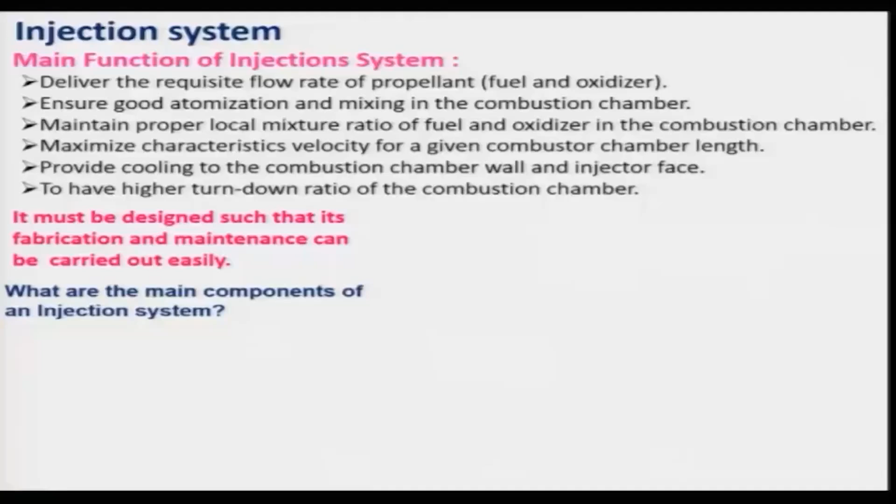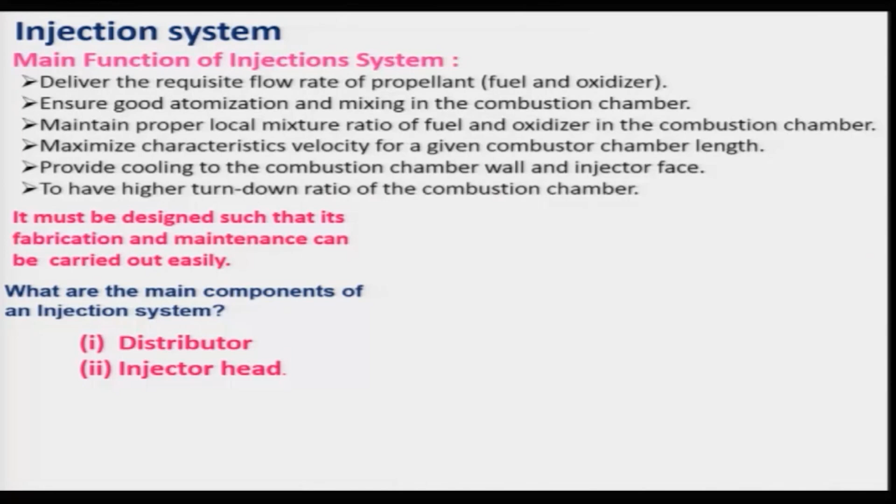What are the main components of an injection system? It has two components: one is the distributor, the other is the injector head, in which the atomizer will be placed. Let us look at a distributor along with the injector head, where the injector head with holes is basically the atomizer. This is the injector head which carries these holes or orifices, which are nothing but the atomizer.

So, therefore, it will be having, if you look at, this is having an atomizer and the propellant. There is a liquid propellant which will be passing through this into this orifice or the injector heads, and then it has to be distributed in such a way that fluid will pass through this in a proper way, so that the uniformity of the flow through each orifice will be similar if not same, so that the atomization process will not be affected.

And this is your schematic. There should not be any short circuiting, that means it should not come over here, there might be a baffle which can be used, not shown here, it should not come and hit so that higher velocity will be coming through this nozzle, that is not really called for, but rather it will be distributed properly.

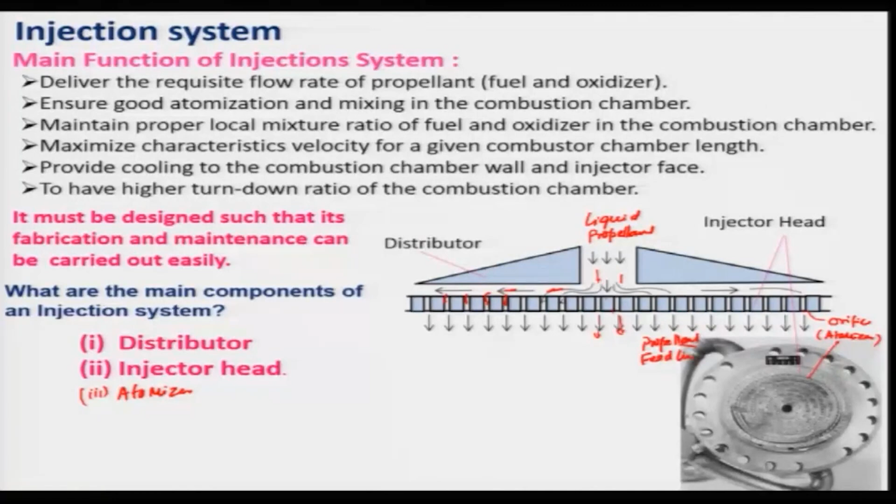And if you look at this injector head which I have shown, this is the actual photograph. You can see these are the holes which are the orifices or atomizer, and which is having a certain circle, a pitch circle it is being used, and this is your feed line, the propellant feed line which comes through that. Below this injector head there is a distributor which is not shown in this photograph.

What is atomization? Atomization is a process by which the bulk liquid is converted into arrays of droplets, what we call spray.

A question might be coming into your mind, why we need to have this atomization? Why not burn the bulk liquid itself? Keep in mind that one can burn the bulk liquid, but however, one has to vaporize the liquid, and also the amount of vaporization of the liquid propellant will be dictating how much energy will be released per unit area per second.

So, we need to convert this bulk liquid into droplets of smaller diameter, such that the surface to mass ratio, or surface to volume ratio, will be really higher. The higher the surface area, the better will be the vaporization, whereas the mass of propellant being burned will be dictated by the volume. So, it is better to have smaller droplets, such that higher surface area will prevail, and due to higher surface area we can have a higher rate of vaporization of the propellant.

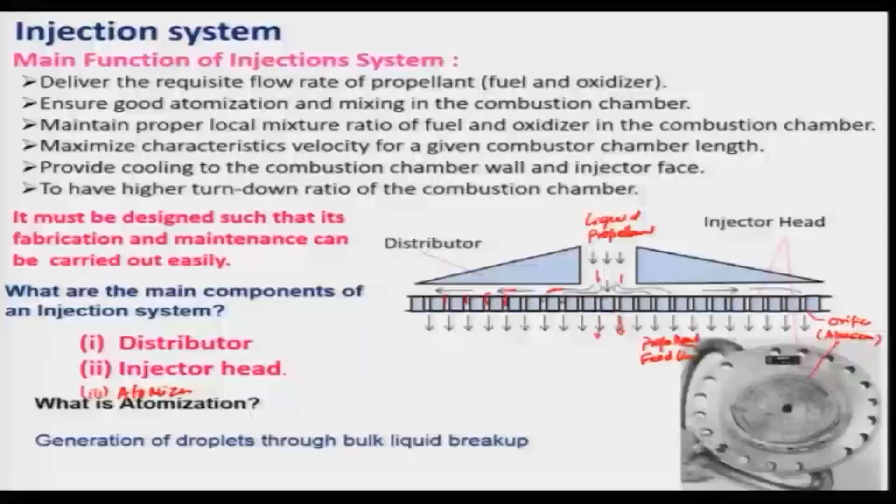And once it is vaporized it can mix with the other oxidizer, such that combustion can take place, provided it is ignited properly. So, it is very important to have better atomization. Let us look at what are the basic processes involved in atomization, or during atomization.

So, let us look at a tube in which you have a liquid passing through it, and what will happen if it is not injected at high pressure - then you can see that the liquid will come over here due to gravity, because of that, it will just be at the orifice or the hole, the exit of this tube.

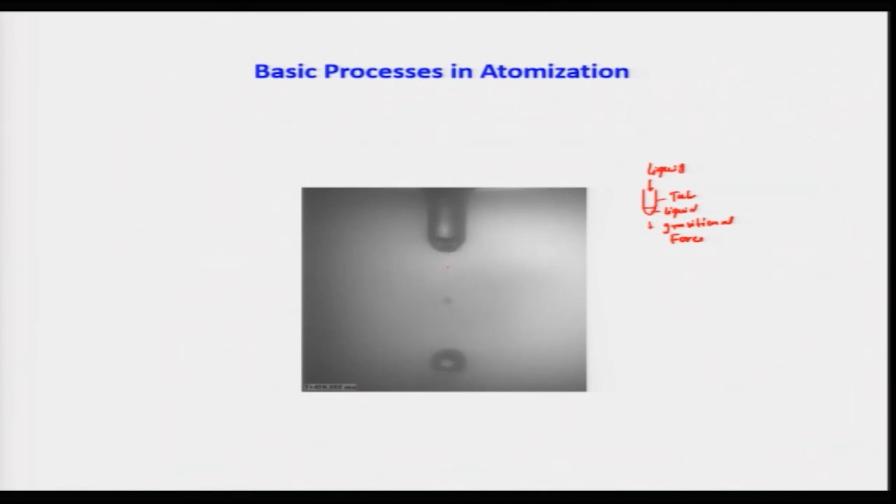This is your liquid envelope which will be coming, and once it goes, then because of gravity, it will be a little bit down, and the surface tension force will be overcome by this gravitational force. And then it will be separated out, as you can see, thinning down due to the thinning of the liquid surface, and when it is pulled by gravity.

And keep in mind that as a result there are satellite droplets, and if you look at this, it will be coming over here, and then it will be thinning down, and this will come to that, and that will be a droplet which comes over here, and this again is being formed. So, this is known as a satellite droplet.

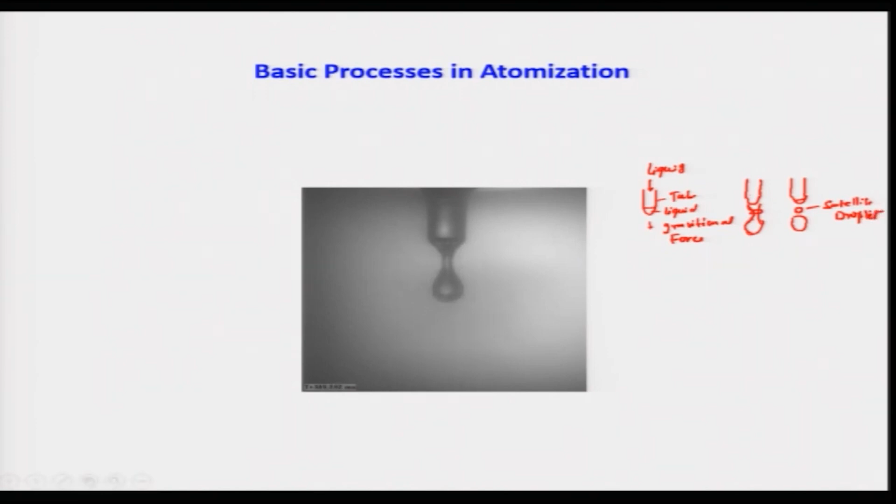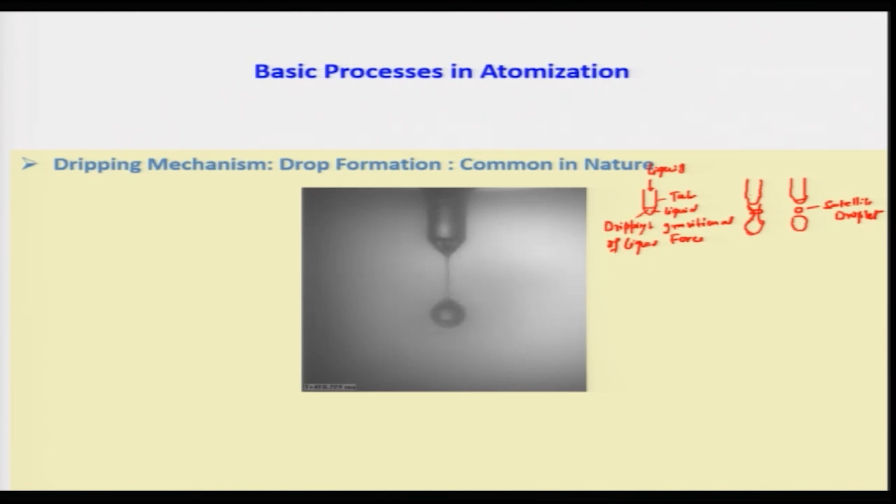And the question arises, what is the dripping mechanism? This is just about dripping of the liquid, and this is basically dripping of liquid, which is very common in nature. So, the gravity force exceeds the surface tension forces acting here, and then it is separated out, and satellite droplets are formed, and also the bigger droplets.

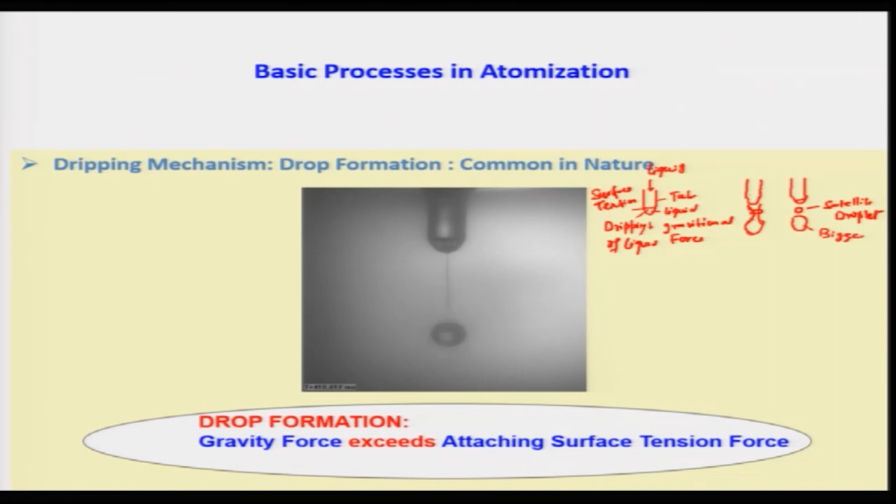The question is, what do you mean by atomization? As I told, atomization is the process by which the bulk liquid is basically converted into arrays of droplets. Let us look a little further and see what is happening.

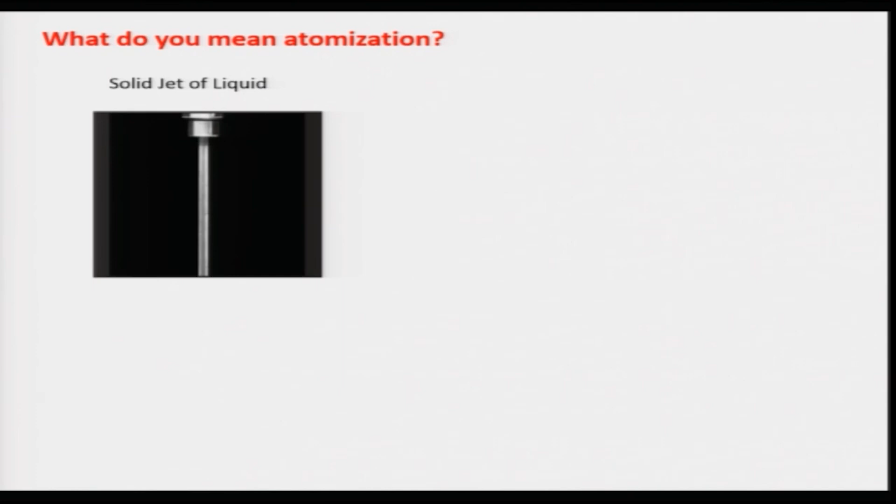If we take an orifice, or a pipe with a hole, and pass liquid through it, a solid jet is coming through that. This is your solid jet of liquid, which is not really affected by the forces acting over here as it passes through this straight tube. Of course, it is very difficult to achieve the solid jet in a true sense, and this solid jet of liquid is used for fire extinction. That means you can use water as a fire extinguisher.

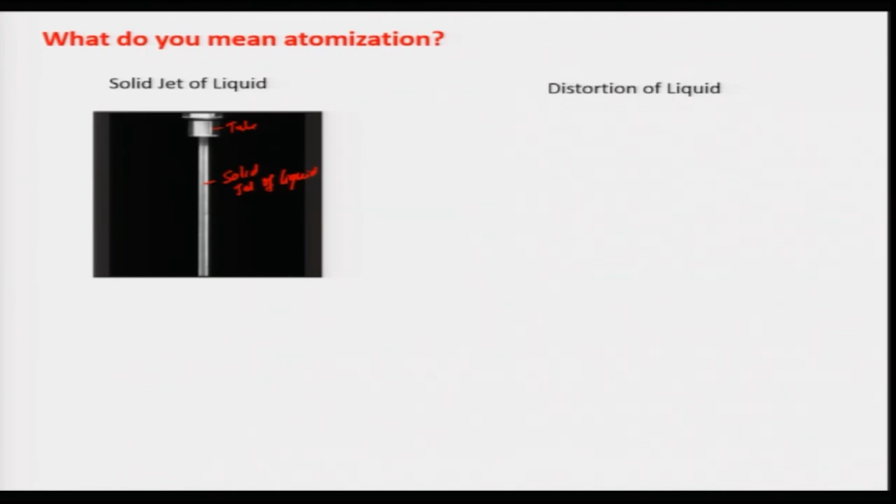But for atomization, this is not what we should desire to have. We are not interested in that; what we need is to disturb the liquid such that it will disintegrate very easily into droplets. That is the requirement for better atomization. So for that, we put the liquid at a very high pressure, passing through this orifice or hole.

This is your hole or orifice, and keep in mind there are a lot of ripples over here, and this bulk liquid is disintegrated, as you can see in this diagram. The question arises: why does the solid jet of liquid remain intact without any distortion? It's because the resisting forces are greater than the disruptive forces.

If you look at the resisting forces, one is the surface tension force, and another is the viscous force. If it is a viscous liquid with surface tension forces, you can have it come out properly as a solid jet of liquid if designed correctly, when resisting forces are greater than disruptive forces. The disruptive forces include inertia force, aerodynamic forces, and turbulence which will be generated.

In this case, when the liquid is distorted to form a spray, the resisting forces will be weaker compared to the disruptive forces. When the resisting forces are greater than the disruptive forces, there is no atomization.

That is also true for a country, for a family, for anything that wants to keep its identity together. When the elements are together, it is like a solid jet of liquid, not disintegrated. When subjected to disruptive forces trying to destabilize, and we can't resist, we get atomization. If you look today, our country is basically suffering due to cultural invasion. We couldn't really resist.

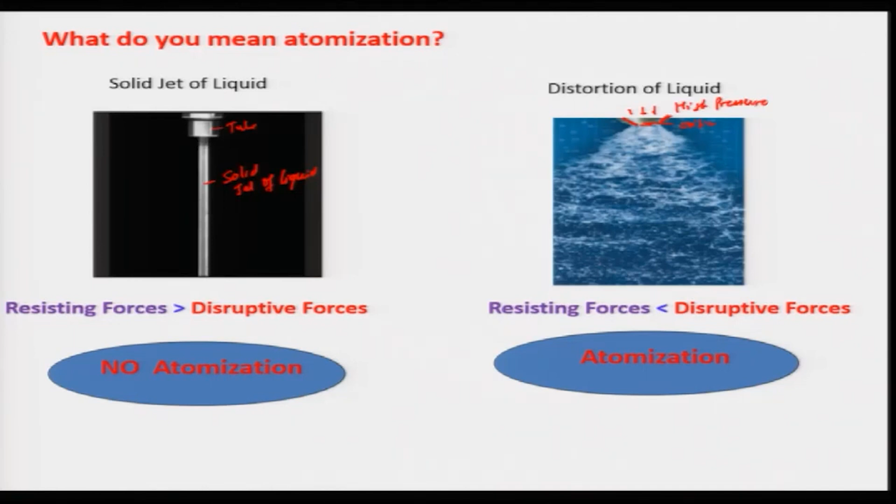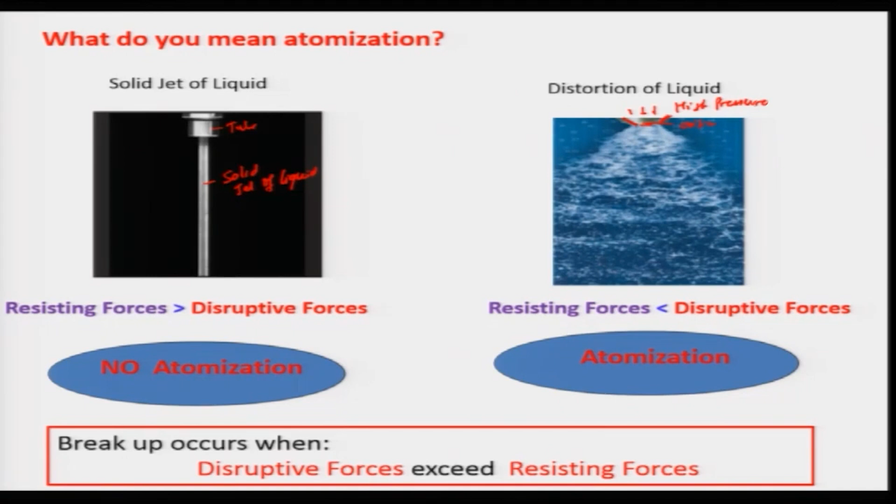However, in case of atomization, there should be higher disruptive forces as compared to the resisting forces. So we can manage to atomize, and then surface area will increase and droplet size will be reduced. So we can summarize that breakup of the bulk liquid into droplets, into a spray, is possible only when the disruptive forces exceed the resisting forces. That is the basic principle one has to look at, and one can use these forces to their advantage. So let us look at the processes involved during atomization of liquid.

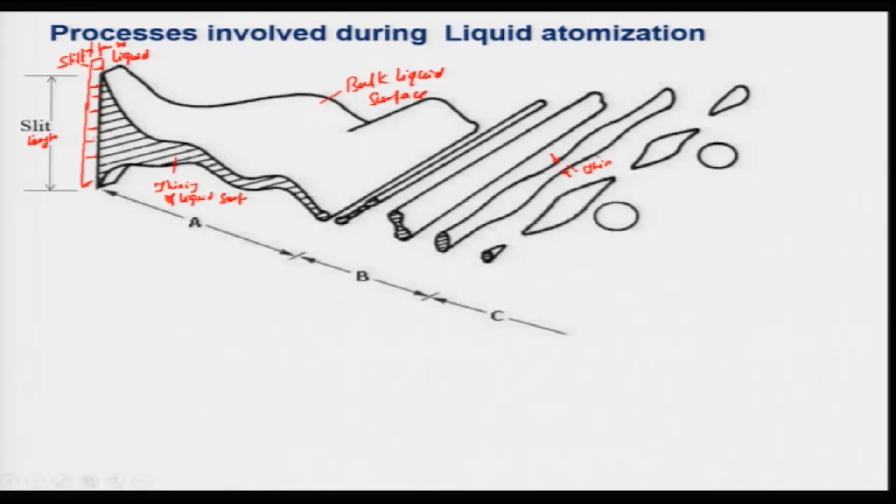The thin surface will be separated out much thinner, and this forms the ligament. This is basically when ligaments are formed from the bulk liquid - we call it primary atomization. Due to the surface tension, droplets are formed. These droplets are again subjected to aerodynamic forces, may collide with each other, and are subjected to turbulence of the flow such that they may be disintegrated again into smaller droplets - that is known as secondary atomization.

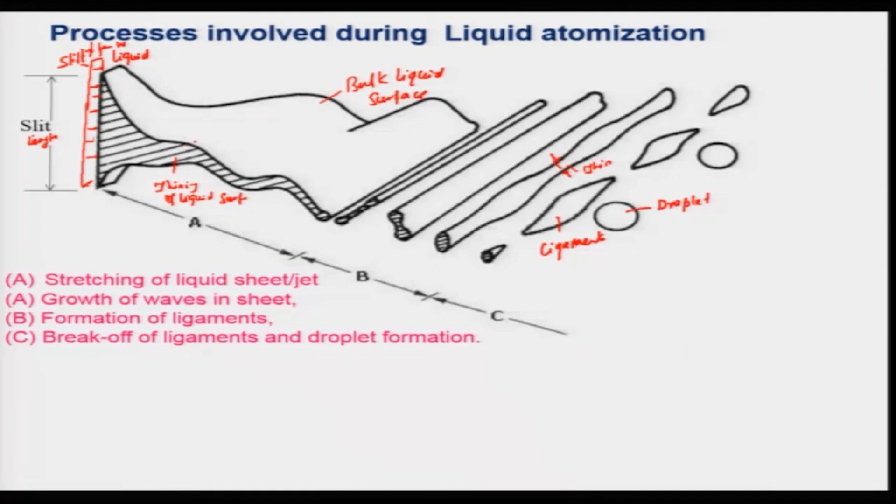To summarize the processes: first is the thinning of the liquid surface, or the stretching of the liquid sheet or jet. This we are considering a sheet. However, when you consider an orifice and the liquid is passing through that, it will be passing through a surface and conveyed as a liquid jet. This can be undulated - we will see the growth of waves in the sheet. These are the waves in the sheets.

Because of this oscillation of the surface, there will be thinning down of the liquid surface in some places, and it will be separated from the bulk liquid, as I told. As a result, ligaments are formed, and breakup of ligaments also takes place, forming droplets. So we will have to look at how this is really done - it is quite a complex process, and as I told, there will be primary atomization.

Where the ligaments are formed after getting separated from the bulk liquid, there is also a secondary atomization, where the droplets formed due to surface tension from the ligaments are further disintegrated and thread off, so that smaller droplets are formed.

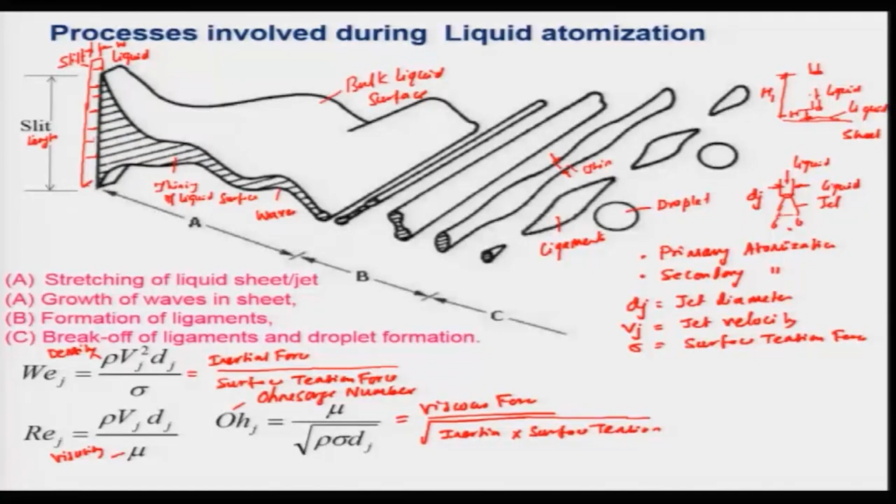This is a very important quantity, because this is also known as the stability number, and we will be discussing more about this Ohnesorge number in the next lecture. Thank you very much.